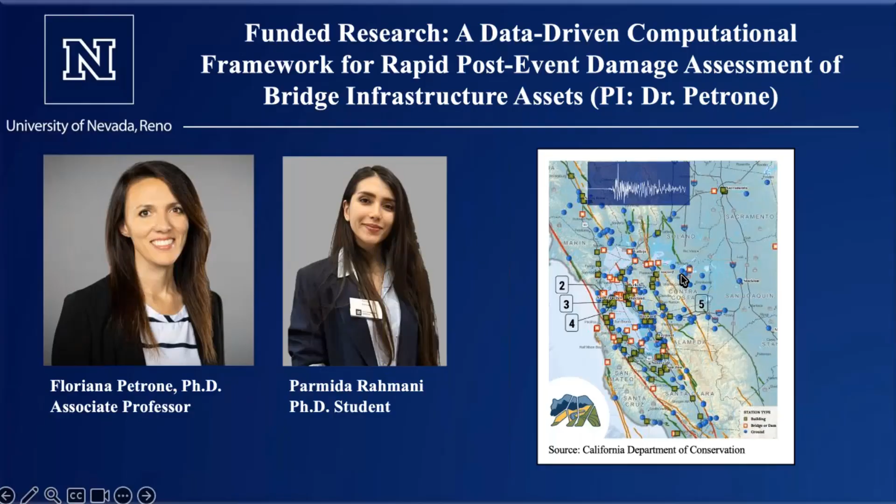In the first part, and I would say the core of her presentation, Parmida will demonstrate how she developed a computational tool to derive pushover curves and damage states for typical bridge columns. Then she will show how these algorithms are being incorporated into a larger automated framework for post-earthquake damage assessment, a system designed to process large amounts of simulated and observed data to estimate bridge condition and prioritize inspection needs. With this, I'll hand it over to Parmida, who will walk you through our methods, results, and exciting next steps for this work.

Thank you, and good afternoon, or maybe good morning, and thank you for being here, everyone. My name is Parmida Rahmani, a PhD student in the College of Engineering at the University of Nevada, Reno, working under the supervision of Dr. Floriana Petrone.

Today, I'm going to focus on physics-informed machine learning for reinforced concrete bridge columns, especially predicting the lateral force drift response and the different damage states. This work is part of a larger framework we are building for post-earthquake bridge damage assessment. The long-term goal is a tool that can help bridge owners quickly screen many assets right after an earthquake.

So here is the roadmap for today's talk. First, I will give a short introduction explaining why post-earthquake bridge assessment is such a challenging problem. Then I will walk through how we model bridges and generate a large library of nonlinear bridge simulations in OpenSees. After that, I will define the damage states that we use.

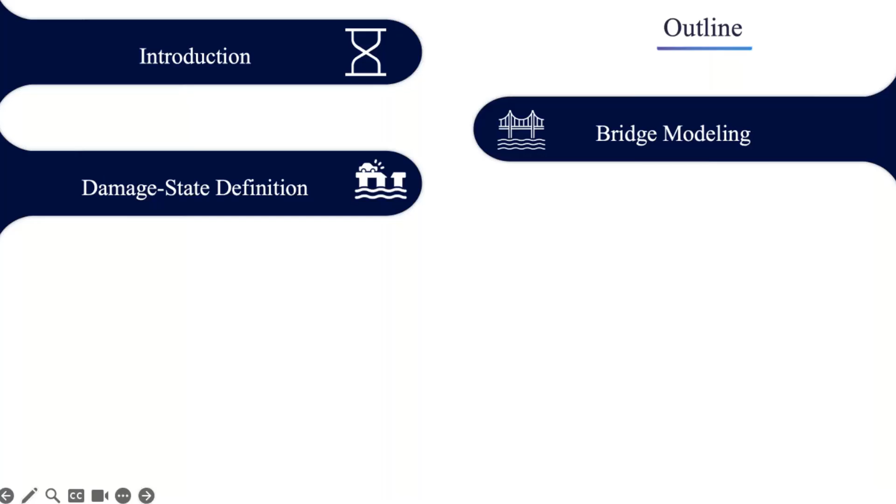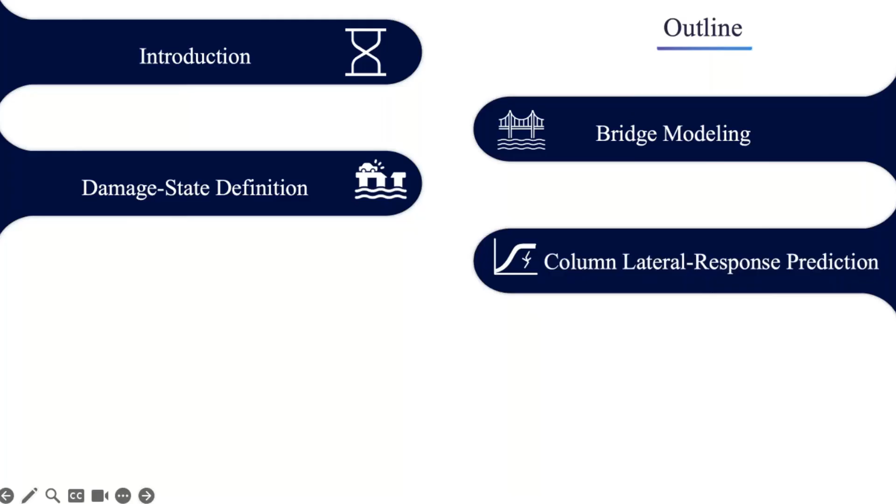From there we move into the first core result, predicting the lateral force drift response of a column and all damage states that we will see in a column. Then we extend that idea to a system level, predicting a full bridge dynamic response under earthquake ground motions.

Next, I will show how we extend and expand the ground motion dataset through simulation-aided data augmentation. And I will end it with conclusions and next steps.

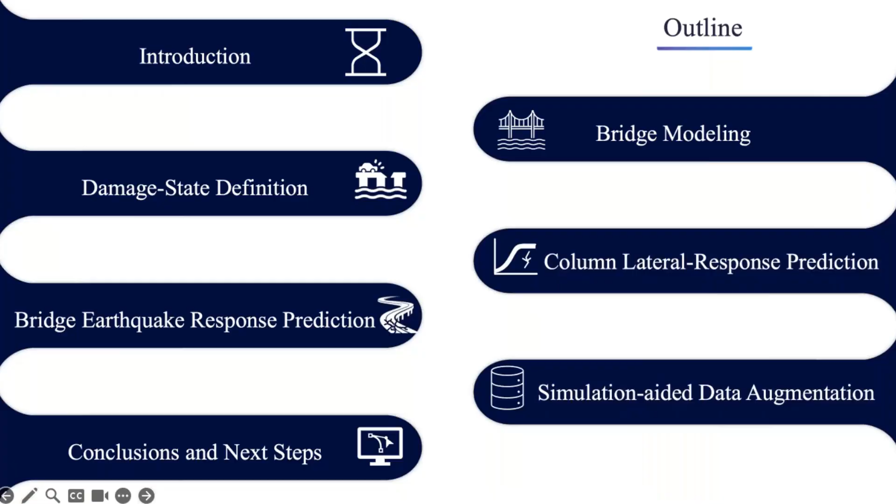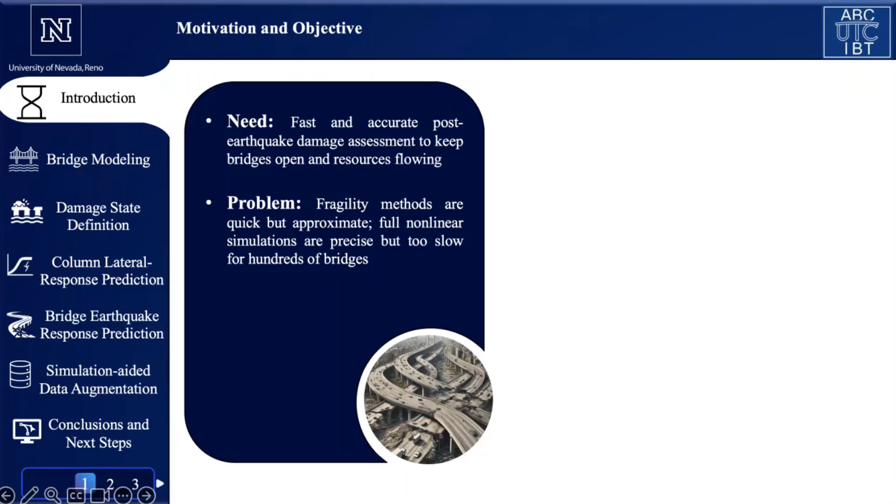After a big earthquake, owners need a fast and defensible call on which bridge stays open. Current tools are in two extremes: fragility curves, which are really fast but not that accurate, and full nonlinear simulations that are accurate but far too slow.

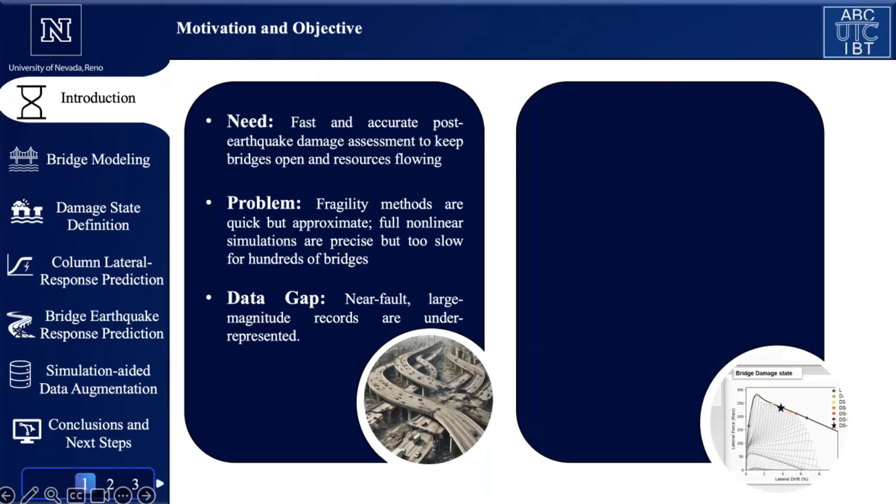We also lack near-fault and large magnitude records, so training data miss the worst cases where it matters most for engineers. So our goal here is a physics-informed, data-driven framework that is both quick and reliable.

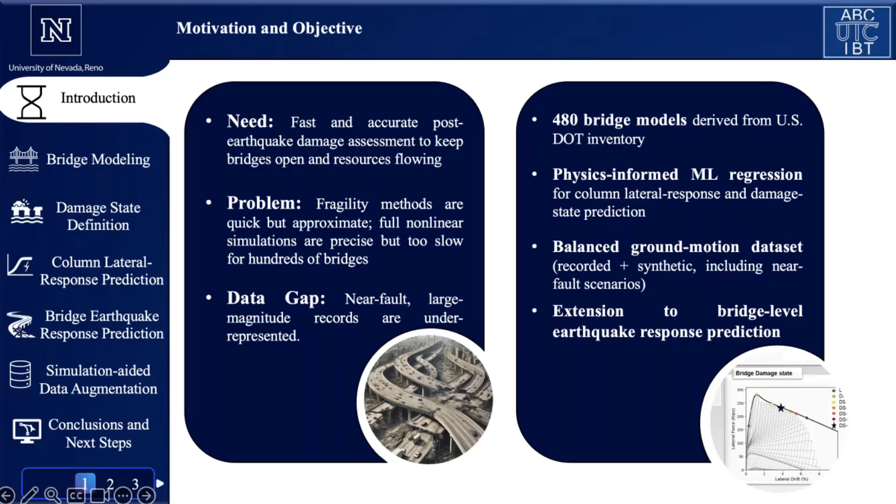We built and validated 480 inventory-based bridge models with realistic detailing. We trained machine learning regressors to predict column force drift, shape, and damage states almost instantly. We balanced our dataset by combining recorded motions with synthetic ones, and we expand and extend this work to bridge-level response. Finally, we deliver everything in a graphical user interface for rapid regional screening.

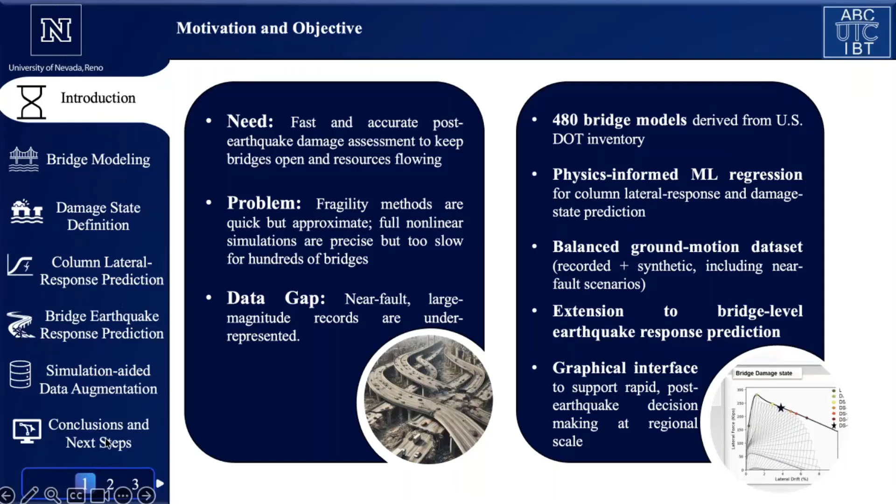In this slide, I will show you the full pipeline and framework of what we have done and what we are going to do. We first built and validated our 480 parametric finite element bridge models and defined the damage states.

We then augment the data by pairing each bridge with recorded and synthetic ground motions to balance rare and near-fault events. Next, we trained and tuned our machine learning regressor to predict the lateral force drift behavior and damage states, and also the final status of the bridge after an earthquake.

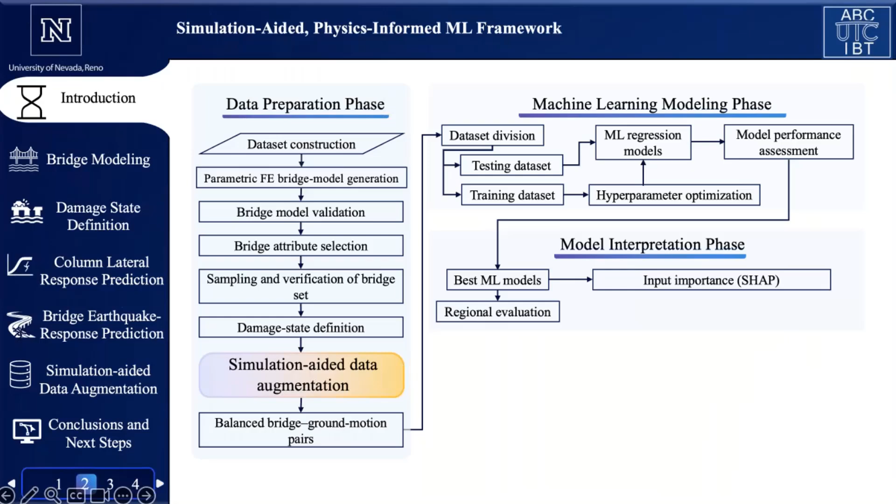Then we interpret the model with SHAP to see which bridge attributes drive predictions and check the regional robustness. Then we optimize our input values to keep accuracy high for field use. And finally, all of this powers a graphical user interface for rapid post-earthquake screening at the regional scale.

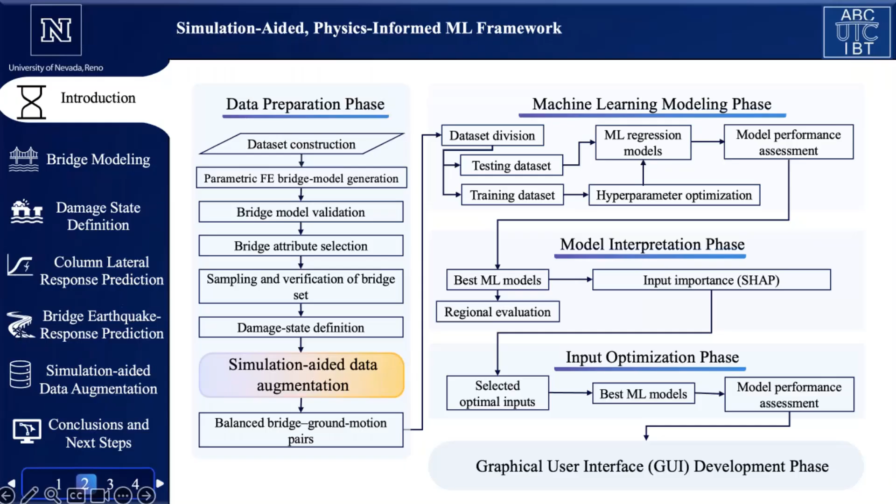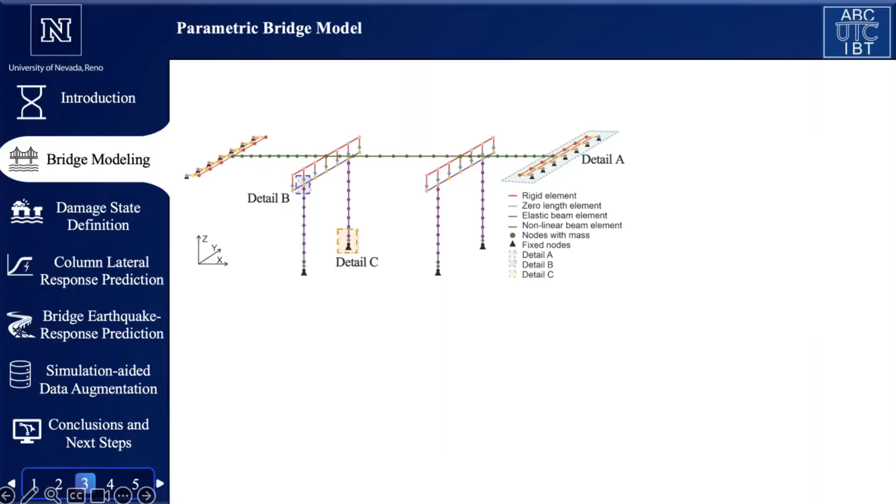Now I will introduce the parametric bridge model that we use to generate the inventory. This is a reduced order finite element model that we can parameterize and replicate across many bridges. The goal is to create a large set of realistic bridge variants so we can study post-earthquake damage at a regional scale. The bridge type we are modeling is a typical multi-span continuous concrete I-girder bridge with a straight alignment and seat-type abutment.

They are designed in what we call Era 2, after the San Fernando earthquake and before the next major seismic code shift. This is very representative of what agencies still have in service.

Even though today's focus will later shift to the column, the global model and the final goal includes all the critical components that influence the seismic response of a bridge: the abutment, the bearing, the bents, and the foundation material. This model is only a template that we vary to build our 480 bridge dataset.

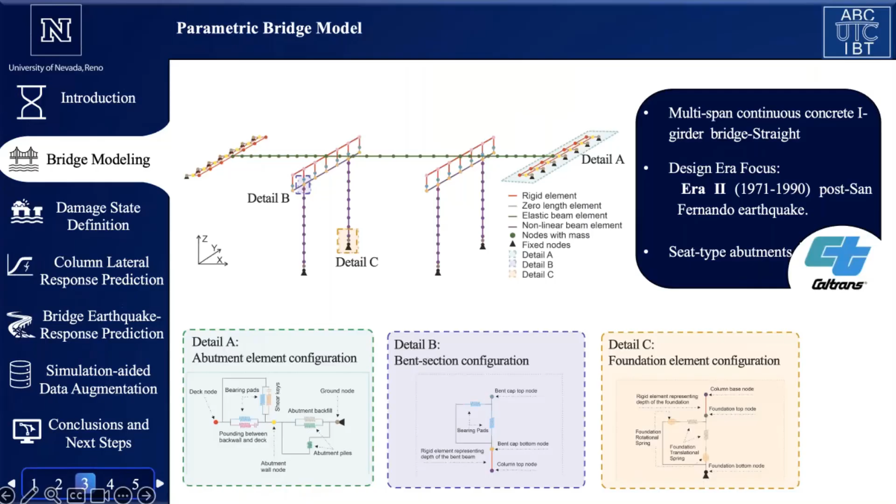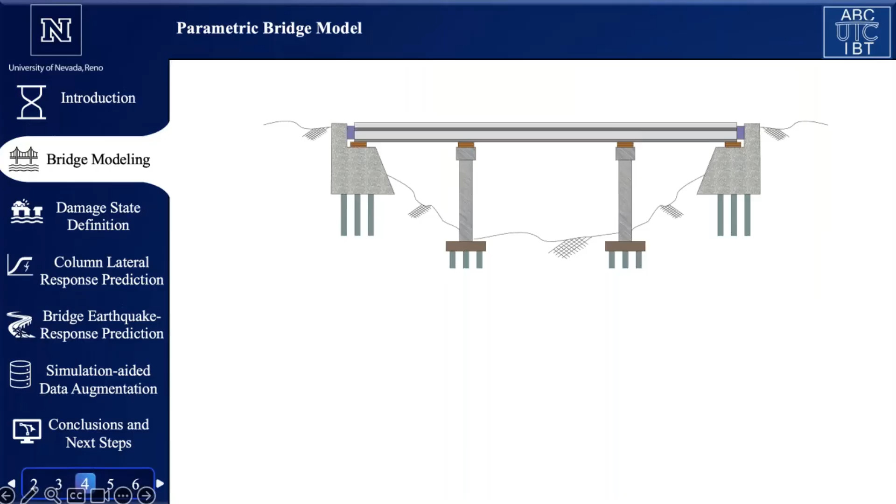This slide shows how we represent the nonlinear behavior of each component in our bridge. Even though later I'm going to talk mostly about the column response and the column damage state, in the global model we don't just idealize everything else. We explicitly model bearing, abutment, shear keys, and foundation using the component-level nonlinear force-deformation relationship from the experimental literature and the Caltrans guideline.

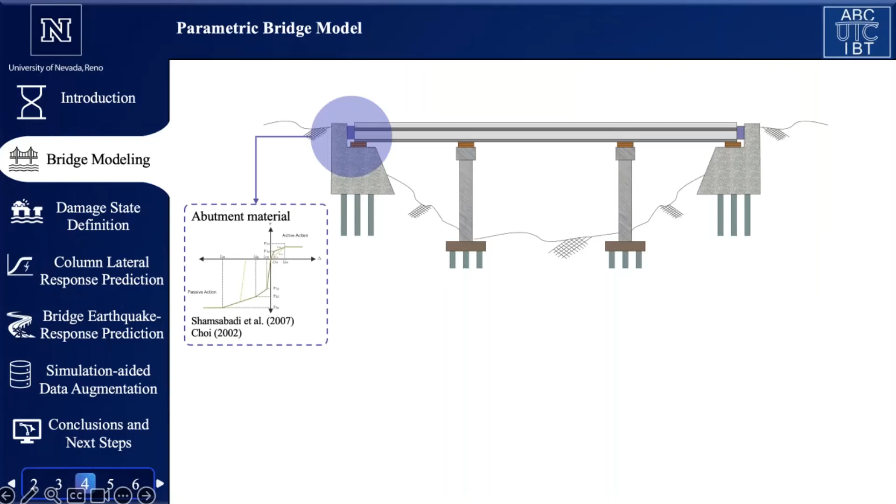Here you can see the abutment backfill interaction, which is modeled using nonlinear passive and active springs following Shamsabadi 2007 and Choi 2002. We also include the pounding behavior between the superstructure and the abutment following Muthukumar 2003, so we can capture the impact and energy dissipation at the seat abutment.

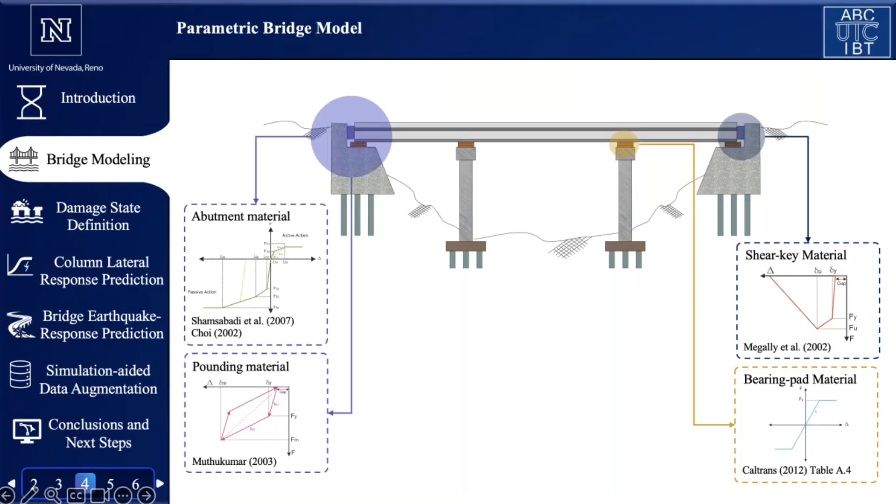We have the interior and exterior shear keys, which are modeled using the backbone curve from Megally et al. 2002, so they can resist the lateral load and then degrade. The bearing pads are modeled using the backbone curves from Caltrans 2012 data, so we have realistic flexibility and they are not just pin supports.

The column and the bent caps are nonlinear elements with nonlinear concrete and reinforcing steel material models. So the bridge model here is capturing all the main nonlinear mechanisms that control the system-level seismic responses, not just the column plastic hinge.

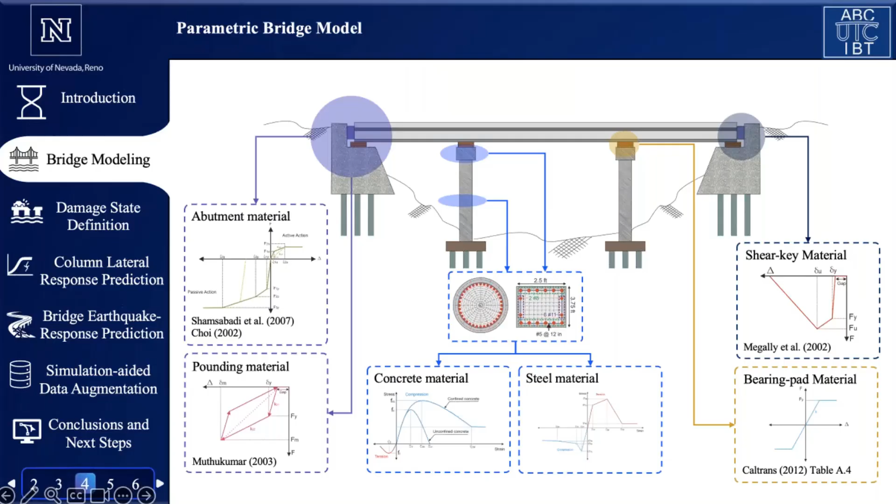In this slide I will zoom in on the column model, because columns are where we define damage. In earthquakes and past experimental studies, the most critical and visible bridge damage is usually concentrated in columns: things like concrete crushing, buckling, shear cracking, or loss of lateral load capacity. So after an event, an inspector typically classifies the bridge condition by looking at the column limit state.

In our framework, the columns are the primary component that governs the damage state. We use the hinge integration with 6 integration points so that the curvature demand is allowed to concentrate in the plastic hinge region rather than along the entire height of the column. At the base, we include two zero-length components in series with the column: a shear spring which can soften and degrade after the shear capacity is reached, and a slip spring which represents bar slip and fixed-end rotation due to strain penetration into the footing.

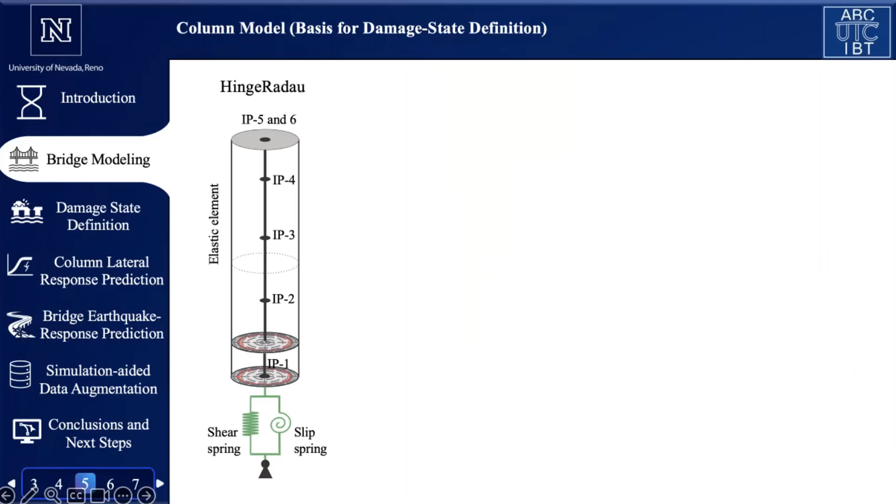That means our column model can represent both flexure-controlled columns and shear-critical columns, which are important in older inventories. To capture the behavior realistically, most of the column is the elastic element, modeled with effective cracked stiffness that keeps the model computationally efficient while still matching realistic global stiffness, and the plastic hinge length is assigned following the Caltrans SDC guideline.

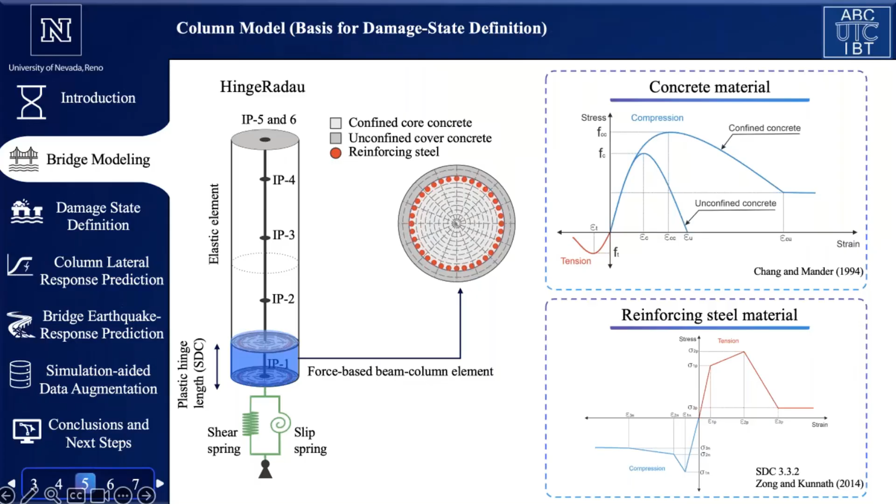So it's scaled consistently with the column geometry and bar properties. For the section behavior inside the hinge zone, we use fiber sections with confined concrete, unconfined concrete, and reinforcing steel. The concrete fiber follows the confined and unconfined compression backbone after Chang and Mander, and the reinforcing steel fiber follows the cyclic stress-strain relationship with yielding, hardening, and post-buckling degradation, consistent with the SDC and also the Zong and Kunnath model, to capture buckling in the steel as well.

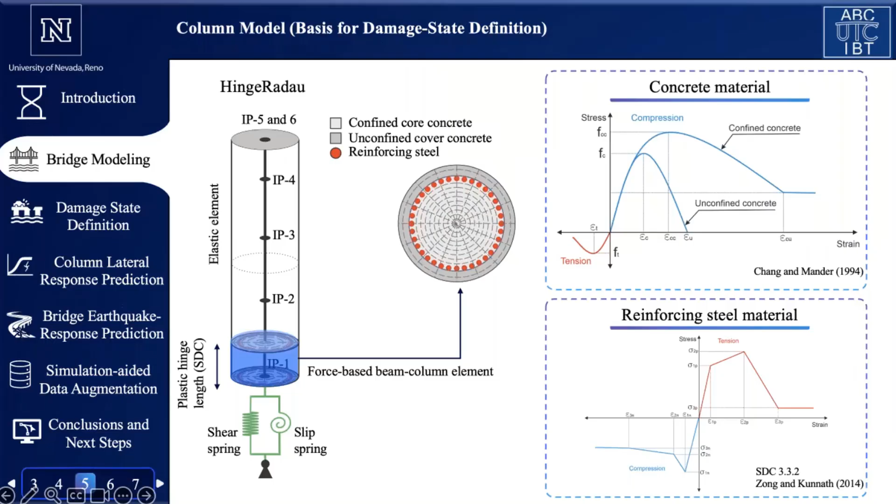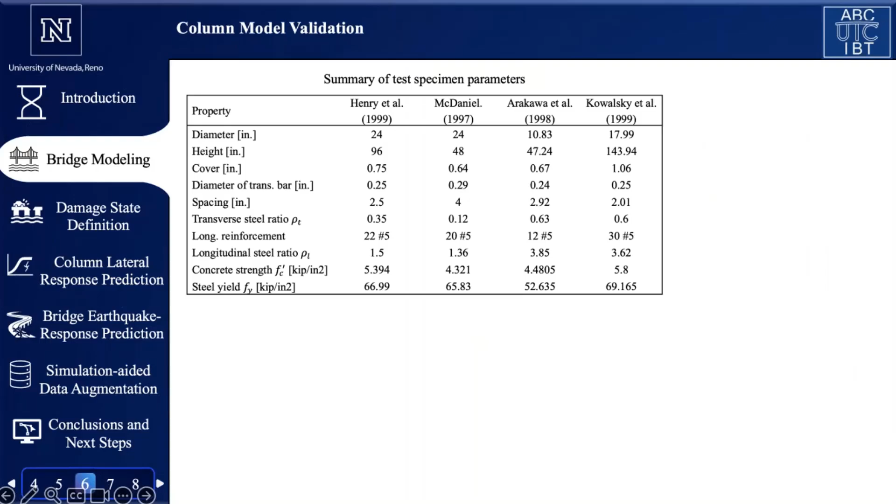The point here is that these tests span different detailing levels and aspect ratios, matching the range we see in our bridge inventory used for modeling. For example, you can see the longitudinal reinforcement ratio here, ranging from 1.36 to 3.85%.

This shows us that our column model can be used for a wide range of the variety of properties of columns. So going forward, when I'm talking about predicting damage state, those damage states are grounded in a column model that has been checked against the test data.

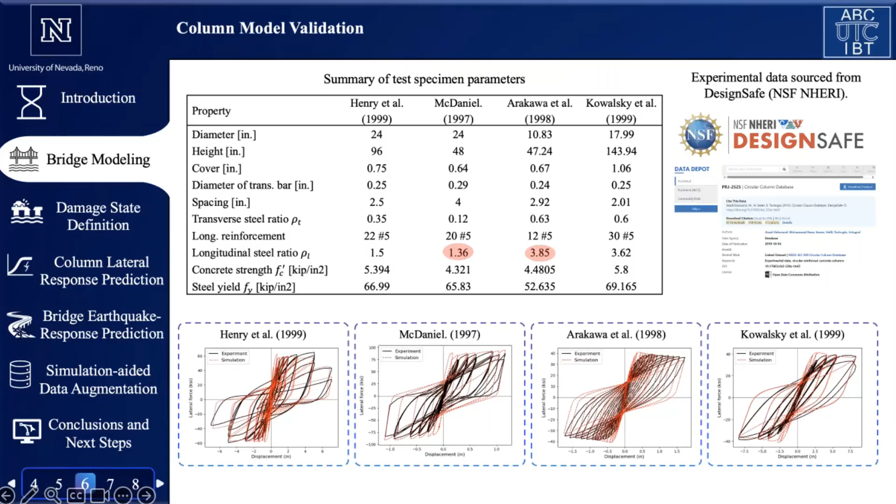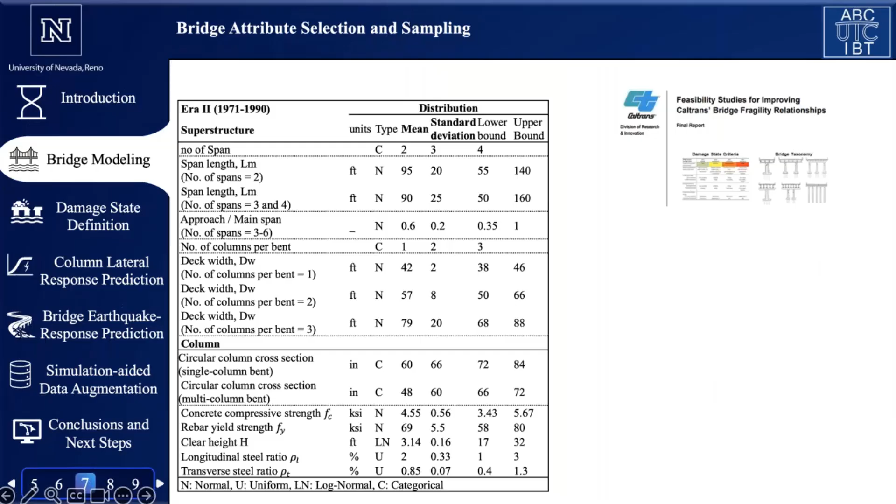The takeaway from this slide is that the 480 bridges in our dataset are not arbitrary. They are statistically consistent with the inventories, and they are sampled in a way that preserves the realistic geometric and detailing characteristics we see in the real world.

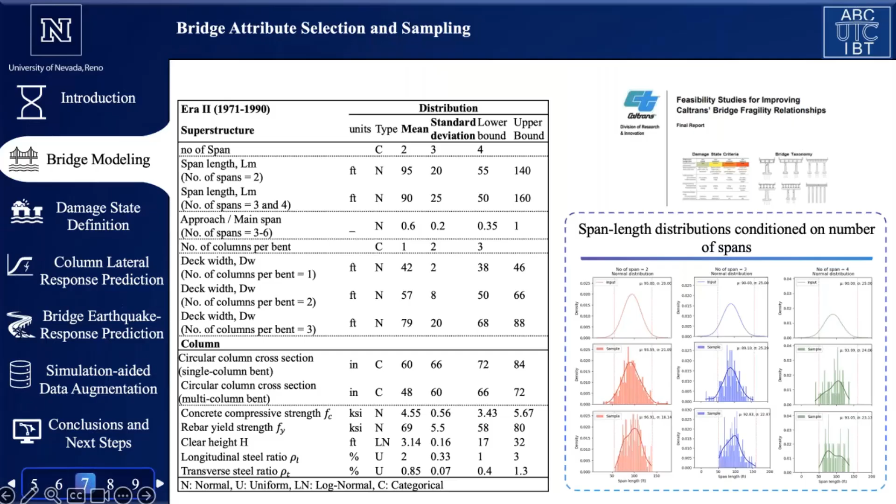So this step is basically a quality screen. It confirms that statistically the bridges in our dataset have periods in the range we would expect for multi-span, seat abutment, reinforced concrete bridges.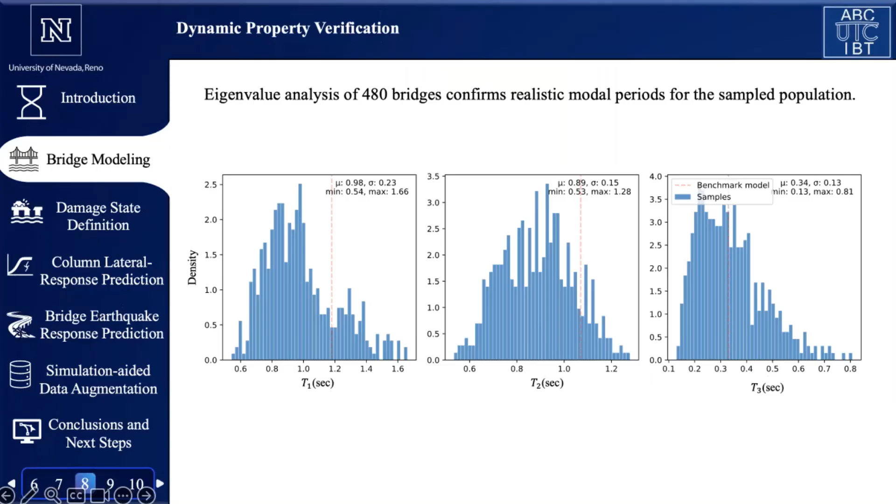You have heard me say that columns control damage from past earthquakes, and from inspection practice, most post-earthquake bridge decisions are driven by column condition, things like spalling, loss of core, exposed steel, bar buckling, and so on. Because of that, in this work we define damage state at the column level. We start from the qualitative descriptions in Vosooghi and Saiidi 2010 and related Caltrans style criteria, and then we translate those into quantitative trigger points that we can detect in our simulation.

Here is damage state number 1, in light green, minor spalling. You are seeing initial cover concrete spalling at the compression face. Structurally, the cover concrete reached its crushing limit, but the core concrete and longitudinal steel are still elastic. This corresponds to early visible damage, but not loss of capacity.

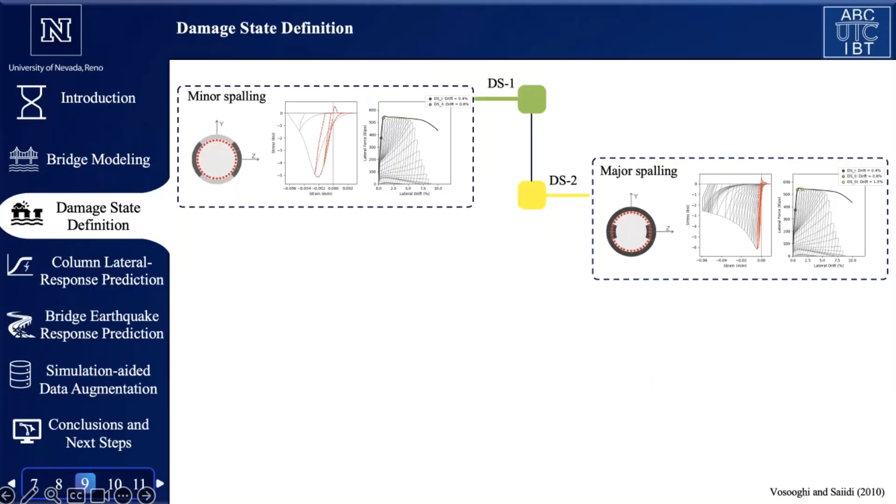Damage state 2 is major spalling. Spalling becomes extensive, the damage penetrates deeper, but the core confinement is still mostly intact and the hoops are still engaged. So you have clear visible damage and you are consuming ductility, but you haven't lost any confinement cage yet.

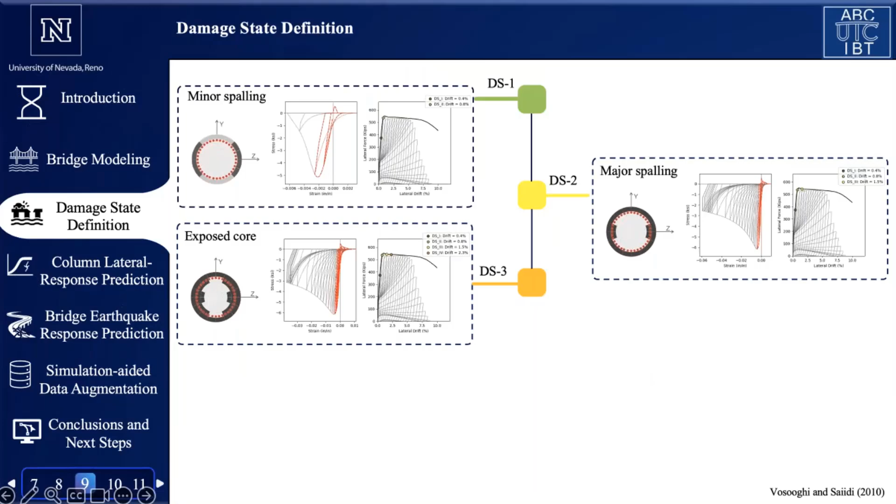Damage state number 3 is the exposed core. At this point, the cover concrete has peeled off enough that you are looking at the core concrete and reinforcement. This is a serious limit state because the confinement is now active and local crushing of the core is starting. In our model, this is mapped to a deeper concrete compression damage in the confined zone.

Damage state number 4 is longitudinal bar buckling. Here, the longitudinal reinforcement starts to become unstable in compression inside the plastic hinge region. In the model, this is where the steel material hits the buckling or strength degradation trigger. Practically, this is where inspectors start thinking about restricted service or closure of the bridge.

And damage state number 5 is multiple bar buckling or rupture, which is essentially the failure. So these 5 states do 2 things for us: they align with what inspectors actually see and report in the field after an earthquake.

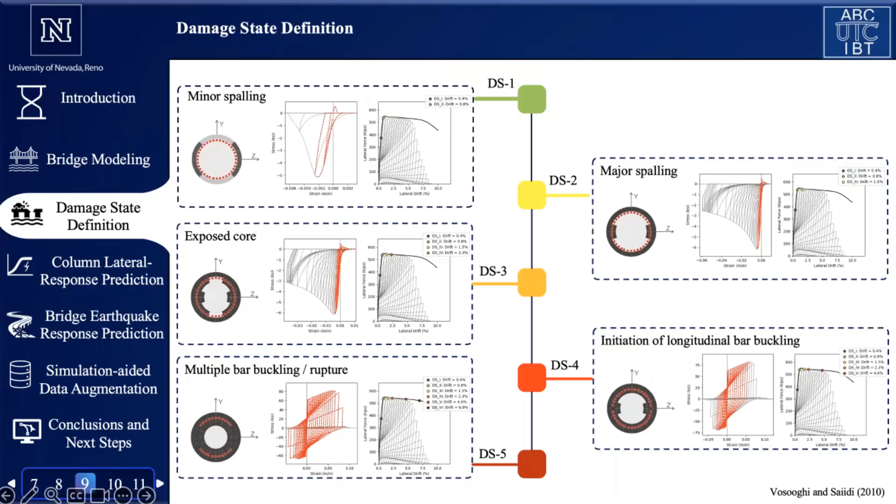Second, they give us a consistent numerical label and numerical values that we can train a predictive model on these data later. Instead of just using a simple binary label like collapse and not collapse, we have 5 physically meaningful stages that give us much finer resolution. It's important because the machine learning model is trained to predict not just safe and unsafe, but which state the column is in. From this point forward, when I say damage state, I mean one of these 5 column level states.

Now that we have defined the damage states physically, we apply them to every column in our bridge population. On the left, each gray line is the lateral force drift pushover curve from one column. The color points mark the first time that the column reaches each damage state, from damage state number 1 in green through damage state number 5 in dark red. You can see a very clear progression here.

Damage state 1 and 2 happen at low drift, near first cracking and spalling, when the column is just starting to yield. Damage state 3, the exposed core, tends to occur a little later around the post-yield area. Damage states 4 and 5, which involve bar buckling and rupture, show up in the large drift softening range, where the column is losing its strength and stability.

On the right, we are looking at the drift ratio at first occurrence of each damage state across all columns in our dataset. For example, how much drift does it typically take for damage state number 1 to appear? What about 2, 3, and so on? You'll notice that the lower damage states have tighter, more concentrated distributions, because the earliest failures tend to happen in a fairly repetitive and repeatable drift range.

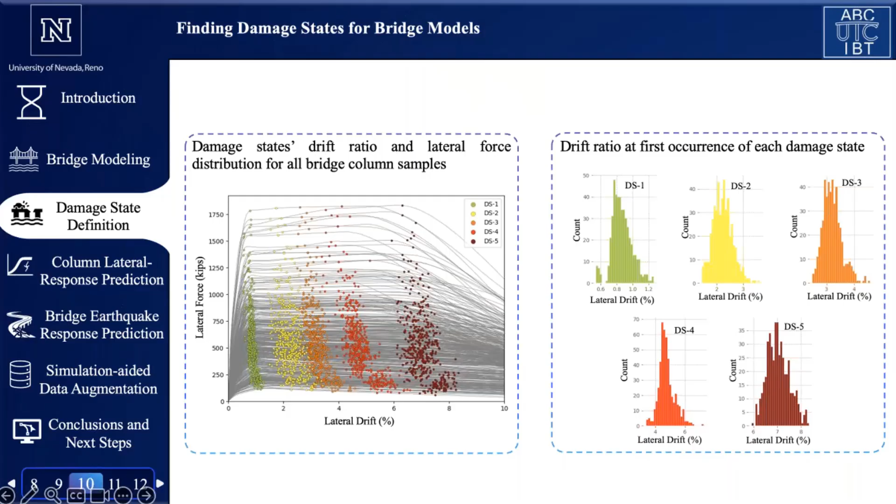And that matters for two reasons. We are not just feeding the model a bunch of redundant copies of the same variables, and it lets us interpret the model more clearly and cleanly later, because each feature is bringing different physical information. Now, it doesn't prove there is no nonlinear interaction, but it does confirm that we are starting with physically meaningful and distinct predictors.

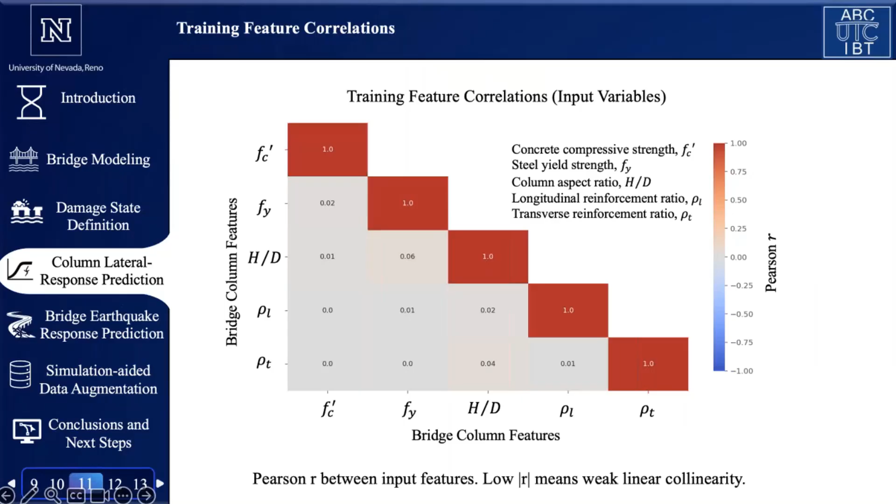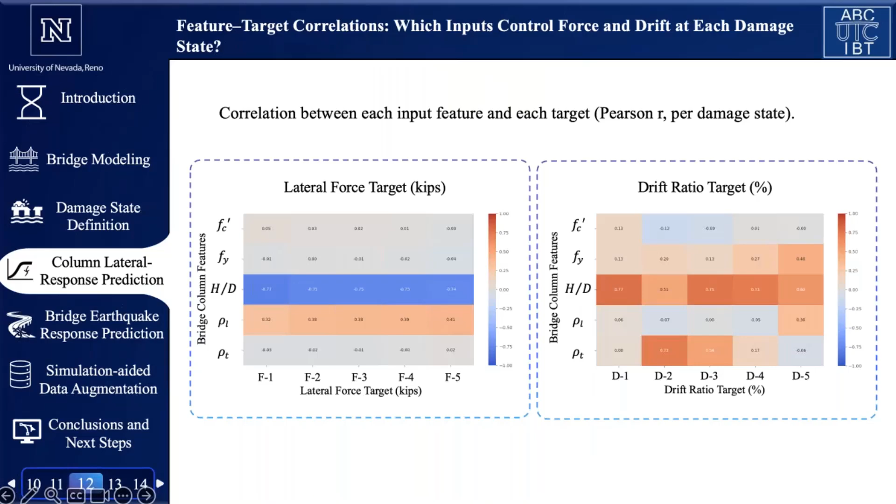But beyond that, in this view, it's hard to clearly see the expected roles of confinement, bar buckling, and bar quantity, because the influence of aspect ratio tends to dominate the correlation. In other words, the slenderness is so strong that it can mask the secondary physics. So to uncover these mechanisms, here we hold the aspect ratio within a narrow range. Basically, we fix the column slenderness, and then we recompute the correlation between each input feature and the drift at each damage state.

And now you can really see the physics emerge. For example, at damage state number 2, which we define as moderate spalling, steel yield strength becomes more important.

At damage state number 3, the exposed core, transverse reinforcement ratio, basically confinement, dominates. Better confinement holds the core concrete and keeps the cage engaged longer, so you don't expose the core as early. That's a classic confinement mechanism for reinforced concrete bridge columns.

By damage state number 5, multiple bar buckling or rupture, bar behavior takes over. Both the Fy and the longitudinal reinforcement ratio are strongly correlated with the drift where those severe damage states occur. That lines up with what inspectors worry about after an earthquake, where you talk about restricted service or even closure.

So by controlling for the slenderness, we were able to tease out and see the role of concrete strength, yield strength, and confinement. Importantly, those roles line up with how practicing engineers already think about the column's damage, and how we define our damage.

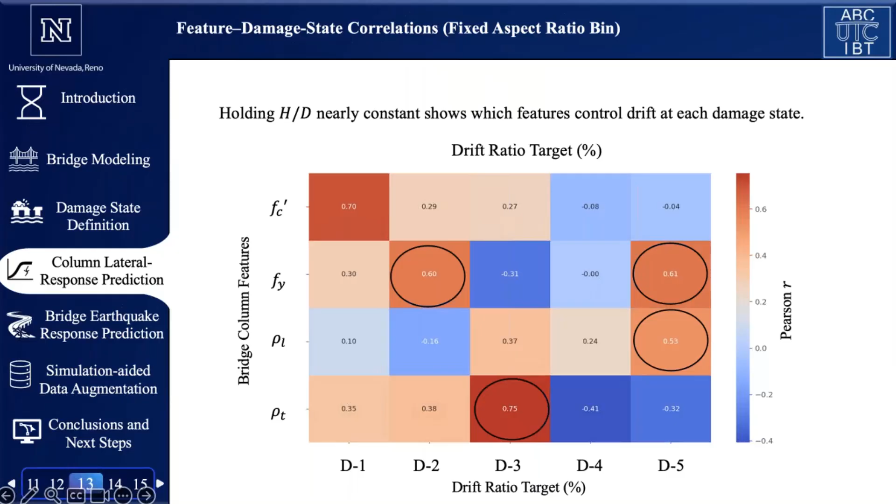Now that we have defined the target, the push curve shape, and the drift at each damage state, we can train our model to predict them directly from the structural features. We evaluate 11 regression models, including linear models, tree ensembles, support vector machines, and a small neural network.

These bar charts summarize the test performance across several metrics: absolute error, root mean square error, normalized error, R square, and the concordance correlation coefficient. Two patterns stand out here.

First, the support vector regression with the RBF kernel consistently gives us the lowest error. For example, it's at or near the minimum root mean square error, and among the highest R square and CCC on the held-out test set.

Second, it does this without a large systematic bias, meaning the predictions track both the magnitude and the trend of the true response. Based on this comparison, we select SVR as our primary predictor, tune its hyperparameters with cross-validation, and lock the model for the rest of our analysis and for use in the graphical user interface.

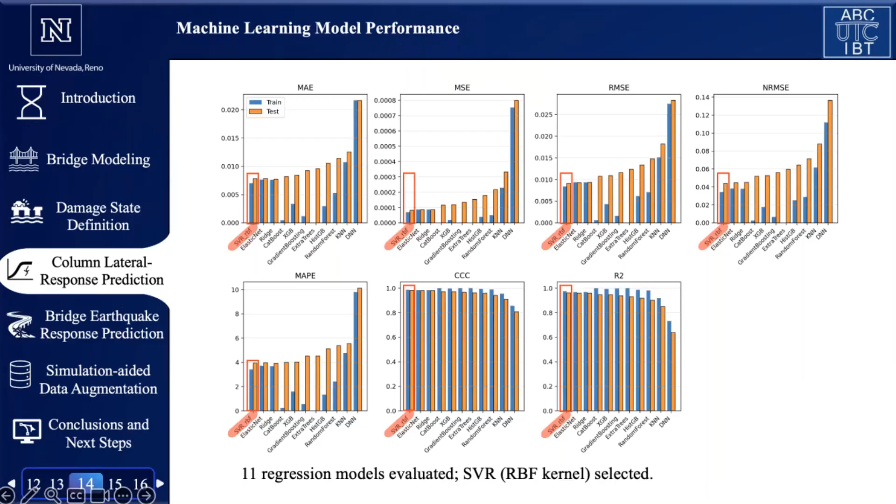Now I will show you what this actually looks like on column models that the model never saw during the training process. Here I'm showing you four columns from the test set, so these were not seen during training.

For each column, the solid gray curve is the true pushover envelope from nonlinear analysis, and the dashed black curve is the model's predicted piecewise approximation. The shaded region between them is the error area, or energy, and the colored markers here are the predicted damage states.

There are two key takeaways here. First, the model is capturing the overall lateral force-drift shape. The area between the predicted curve and the true curve is small, which lines up with the low root mean square error and high R square you saw in the previous slide.

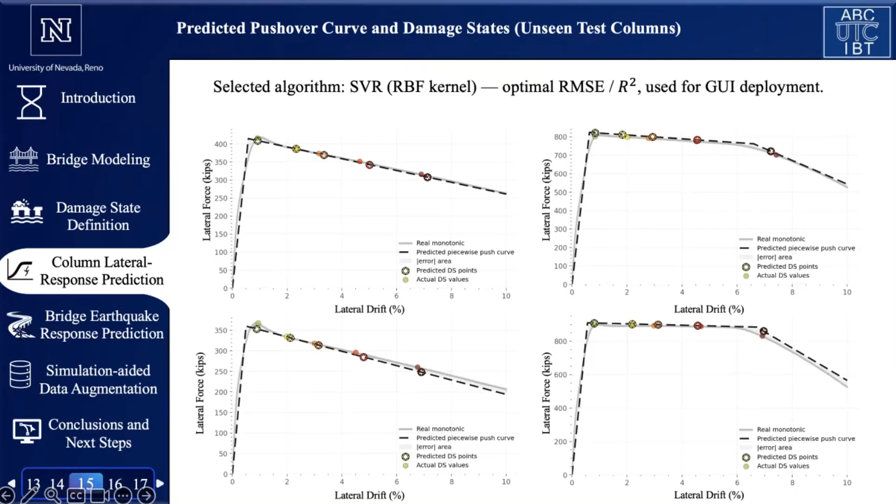Second, and more importantly, the model is placing the damage states close to where they actually occur in our nonlinear analysis results. Up to now, everything I have shown was at the column level under lateral loading, using machine learning to predict each column's pushover curve and the drift at which it reaches each damage state.

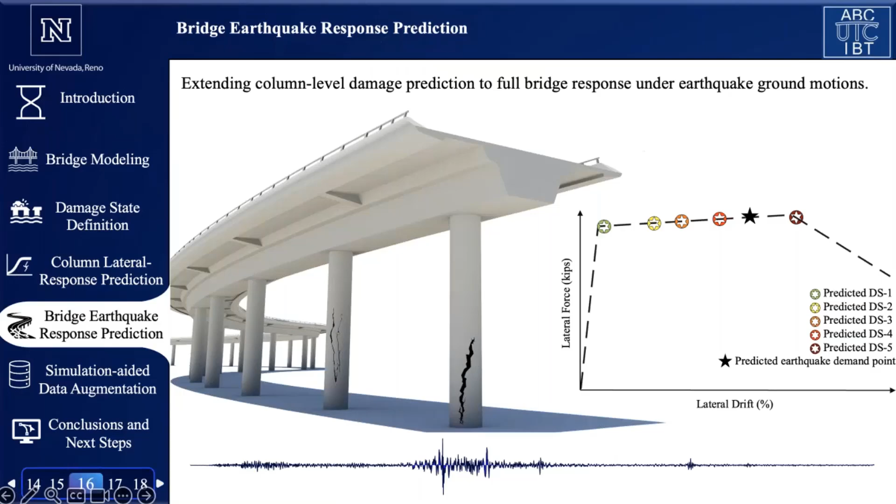Now we have talked about the bridge side of the problem a lot. We built a realistic inventory, we modeled the column in detail, we trained our model that can predict the push curve and the column damage state. Now we need the other half of the equation, the earthquake demand.

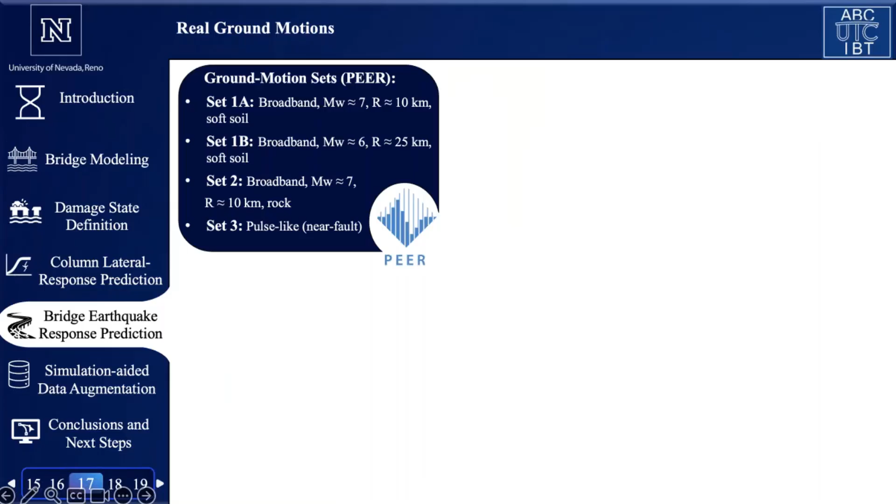And this is a problem: those high intensity motions are exactly where bridges are most likely to hit damage state 4 and 5. Those are the states where owners have to decide, do we shut this bridge down or can we use it? So to test how this affects predicted damage, we randomly paired the real ground motion with our 480 bridge model.

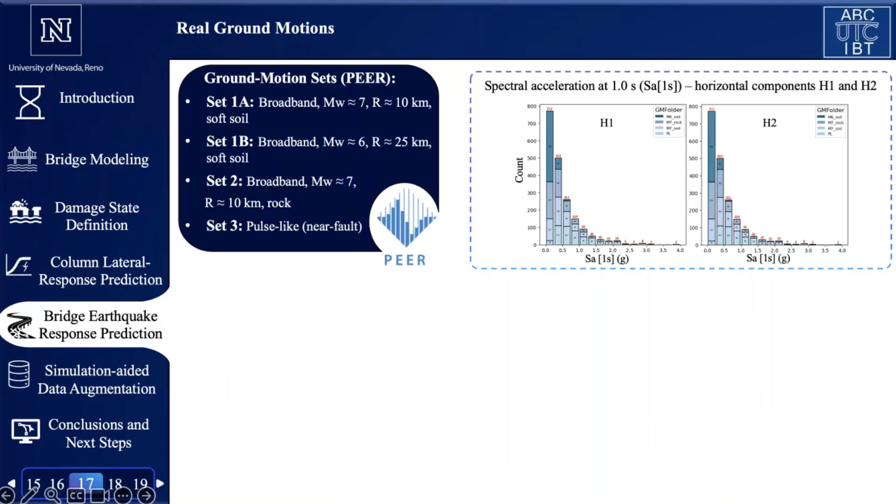Second, you will notice that almost everything is living in damage state 1 and 2, and we almost never hit damage state 4 and 5 or collapse in this sample of recorded motion. That's not because the bridges are magically unbreakable. It's because our real recorded motion set underrepresents the really damaging, high intensity shaking.

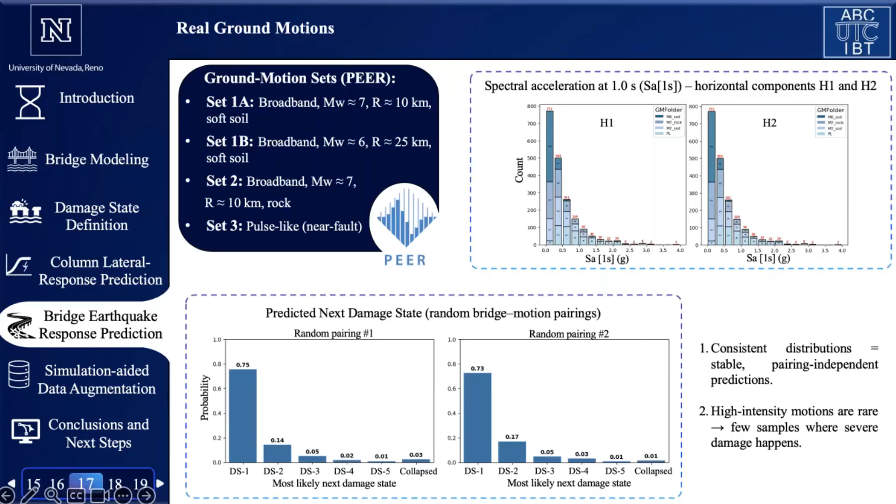And that is the gap. If we train only on these recorded motions and use only this motion, the model doesn't see enough severe damage, which are actually the ones agencies care about most after an earthquake. So in the next step, we'll augment and try to balance the motion.

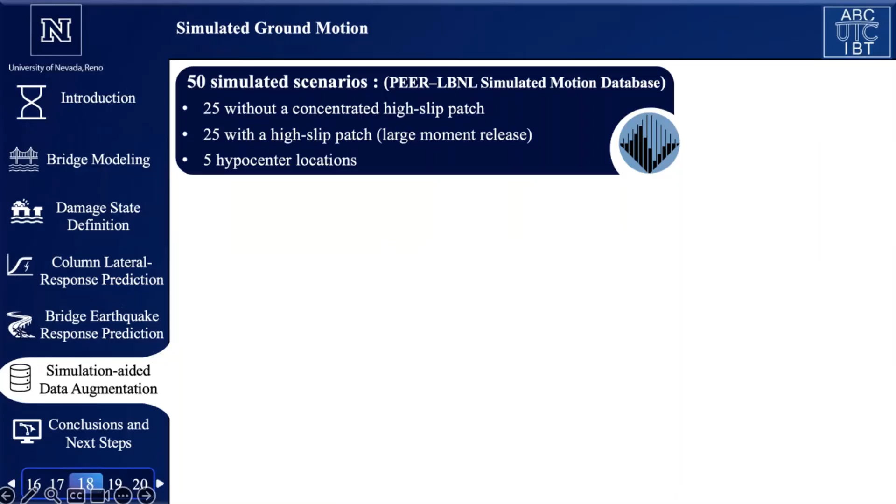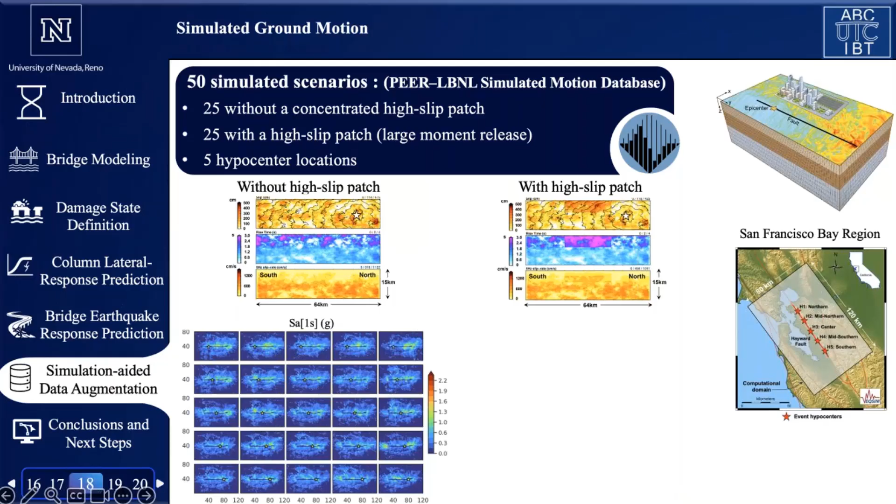And here are the spatial maps of the spectral acceleration at 1 second for the no high slip patch cases and the with high slip patch cases.

We cannot use all of those synthetic motions because they would again create an unbalanced set, since most of the motions are far from the slip, far from the fault, and they are not giving us that high intensity motion. So, I want to just review and summarize what we have done.

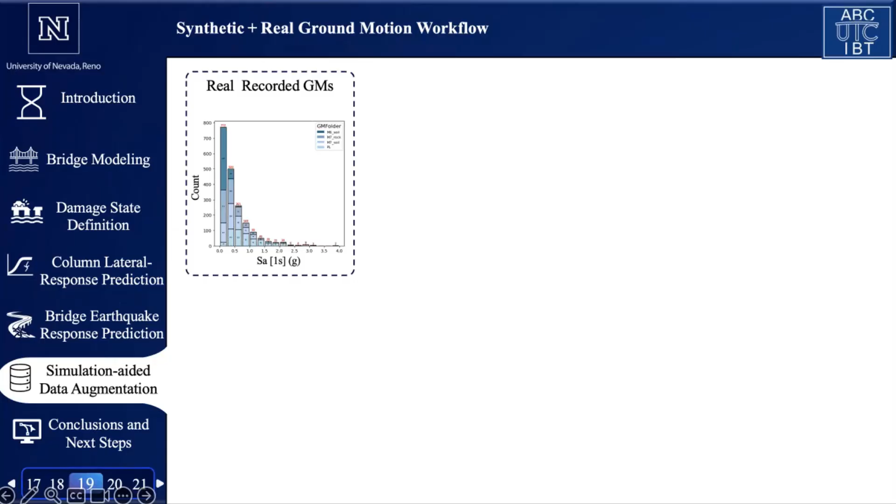We start with the recorded PEER motions. Their spectral acceleration at 1 second distribution is heavy on the low to moderate intensity and thin in the high intensity tails.

Next, we bring in simulation scenarios and filter them, keeping only those cases that span the missing high intensity range. Then we merge the recorded and filtered synthetic set to get a more balanced intensity measure distribution, filling the high spectral acceleration bins without overwhelming the data set.

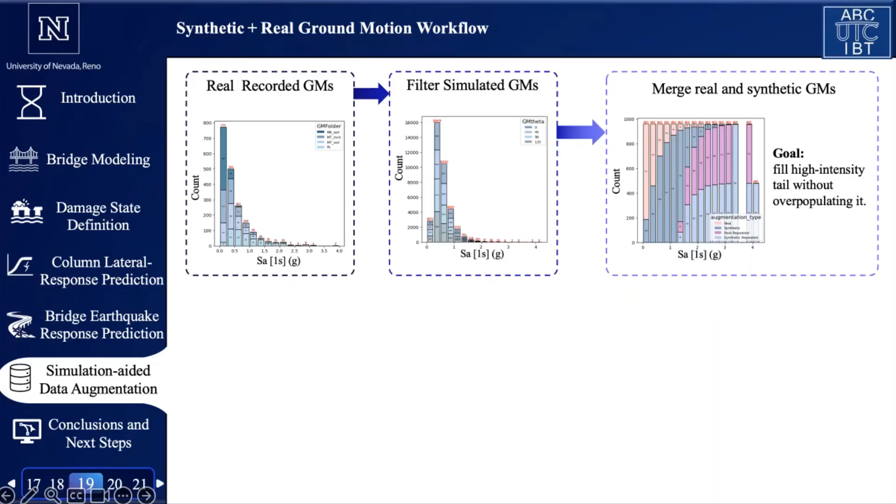We pair this motion set with the bridge population and predict the most likely next damage state for each bridge and motion pair. We now see damage states four, five, and collapse appear here, although the distribution is still somewhat skewed toward states 1, 2, and collapse. To fix this, we train an initial model and interpret it. The feature importance shows that the pulse period, spectral velocity, fundamental period of the bridge, and several bridge attributes strongly drive the damage.

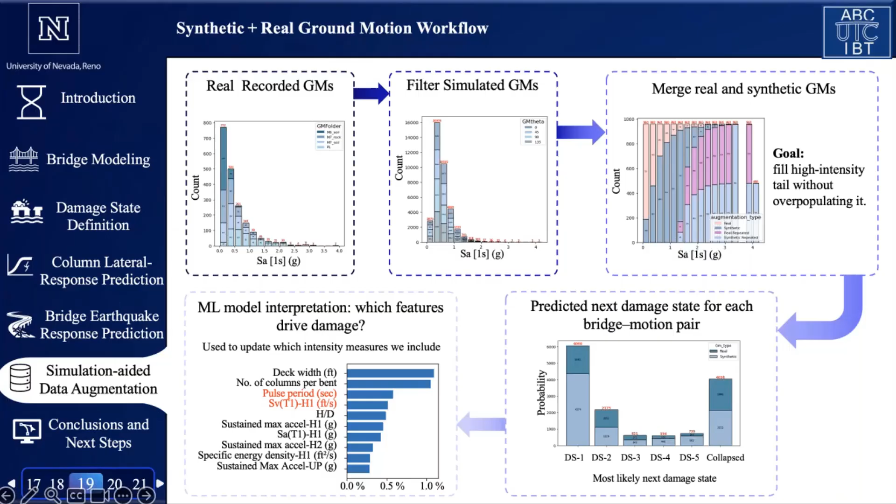We use that insight to define a repeatable selection loop. In this slide, I'll show you a diagram of the control logic for how we iteratively build a balanced and physically consistent data set.

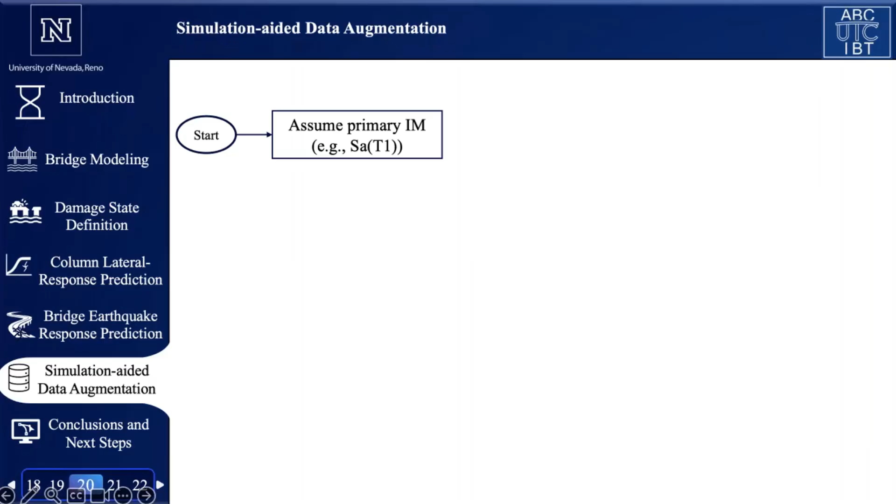We pick a primary intensity measure to organize the motion, starting with spectral acceleration, and compute that intensity measure for recorded motion and in parallel for synthetic motion. Then we find the undersampled bins in the real motion distribution. Next, we filter our synthetic and simulated ground motion to fill those gaps. We merge these motions together and resample to flatten the intensity measure histogram.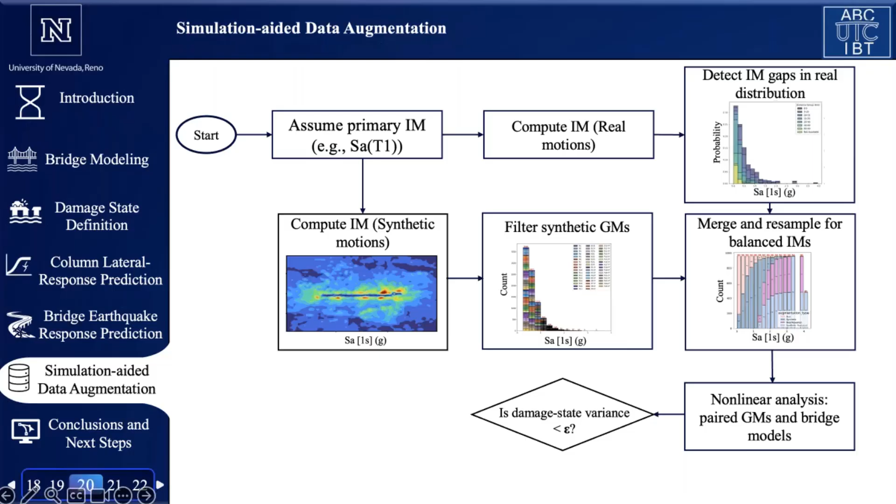We pair each motion with our bridge inventory, run a nonlinear analysis, and label the most likely next damage states. If the damage state distribution is still skewed and the variance exceeds epsilon, we train and interpret a model to identify a better intensity measure and key bridge attributes. Then we update the intensity measure and go through the loop again.

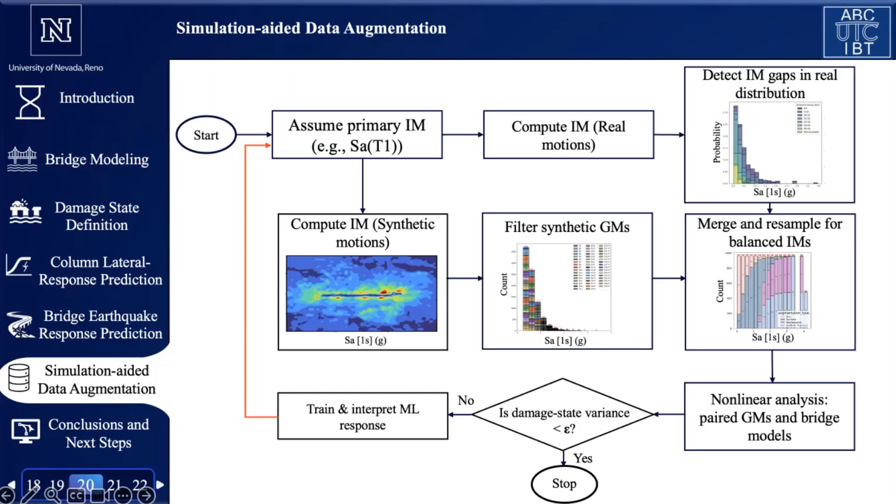We stop when the damage state spread meets the criteria, giving us a balanced training set that reflects both moderate and severe damage. This loop is why the final predictor generalizes well: coverage is balanced and the features are grounded in bridge physics.

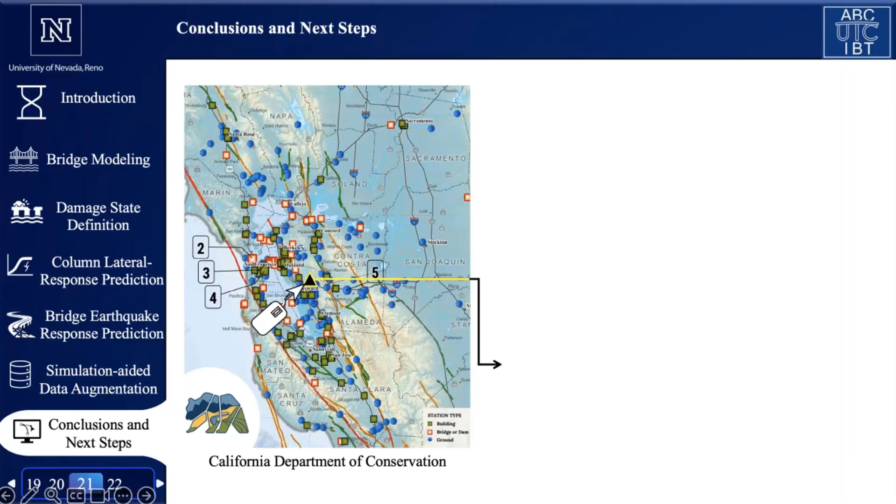Imagine we are the California Department of Conservation. After an event, a user clicks a location on the map and retrieves the ground motion intensity measure for that site. They select the bridge of interest and enter its attributes, span length, number of columns per bent, and so on. Our trained model combines those attributes with the intensity measure and gives not only the shape, the envelope of the cyclic pushover of the bridge, but also the different damage states and the final state, the damage state that bridge will be in after an earthquake.

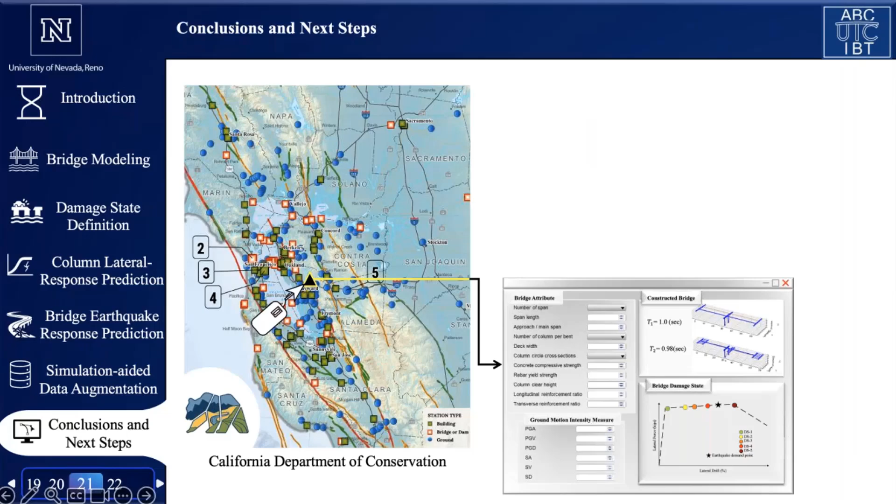What we delivered here is a large scale data set, generated for 480 distinct bridges which are realistic, a robust ground motion selection, and a trained regression machine learning model for piecewise pushover shape, continuous damage state metrics, and earthquake demand.

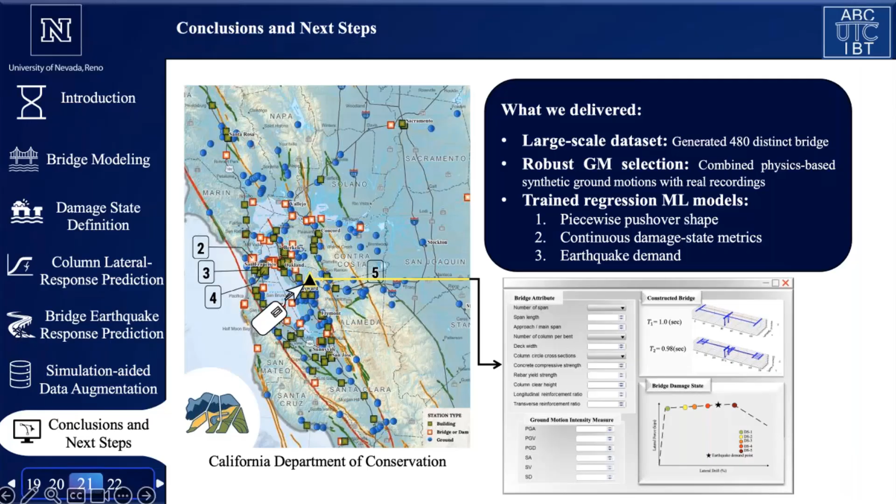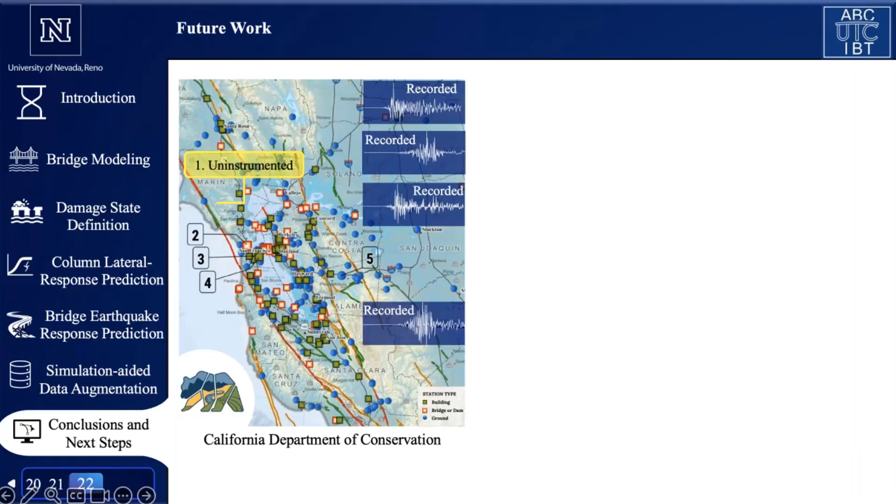Our future work: for example, here at the California Department of Transportation or Conservation, you can see site numbers 2, 3, 4, and 5 are recorded and instrumented locations. But if someone wants to see the bridge status after an earthquake in an uninstrumented location, there are two paths. You can use physics-based simulation, which needs a lot of high performance computing, money, and effort, or you can use the machine learning model, also using synthetic motion to validate the model, to use the neighboring intensity measure of the station and predict the intensity measure of the uninstrumented location and area.

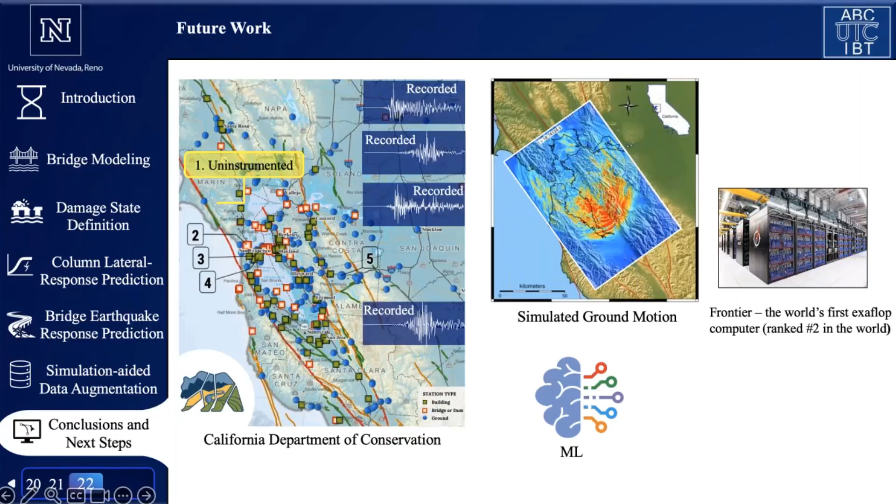Thank you for your attention.

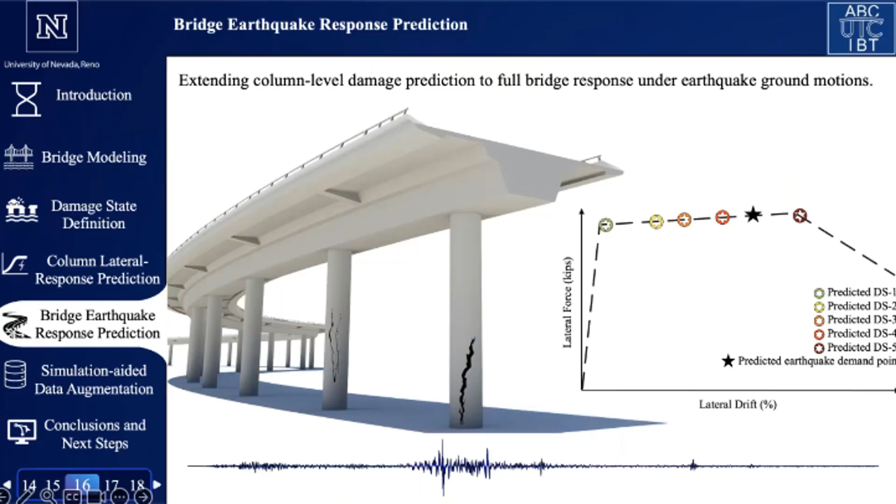Another interesting question involving AI: can you discuss AI hallucinations in context with this project? We constrain the input to the physics-based variables. We train within the domain. We apply the push curve checks and validate it with the experimental data and surface uncertainty flags. So if a query pair is outside of that envelope, the graphical user interface just pops up, noting the error, and that the inputs you gave us are out of scope.

Here's another one. It says, this is interesting research, but can it actually be used in the case of an earthquake? And is there a factor of safety and also reliability? We didn't do a factor of safety or reliability, but it's just a hint, a flag that comes to the owners, and they can decide to send the inspector immediately. Maybe I can hand it to Dr. Petrone to explain more about this question.

Sure, so really this is strictly related to what we were just describing about reliability. We haven't, and we're not going to, introduce any safety factors. We are just going to provide, possibly in the near future, our best prediction with a range, just a confidence level, a range of uncertainty, making the end user conscious about conditions where that prediction may be affected by large uncertainty, and where inspection might still be needed, especially for high damage cases. In cases where that uncertainty is very small, very narrow, we can have larger confidence in those results.

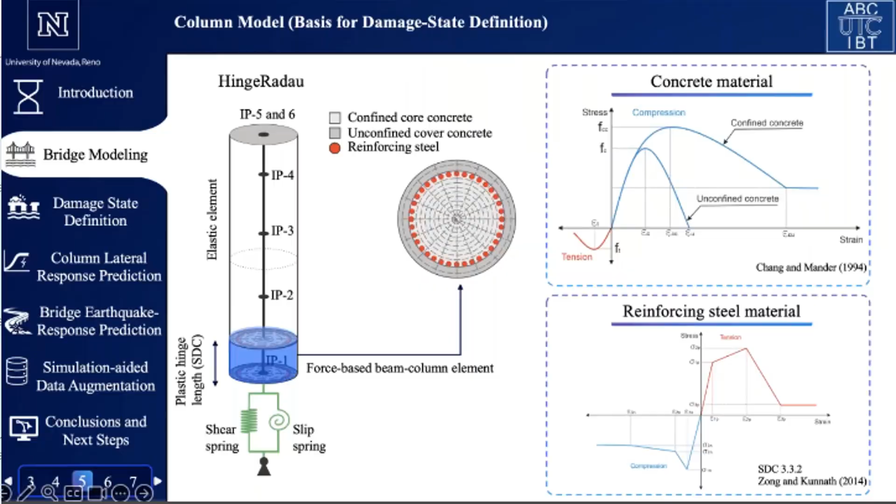How long does it take for an owner to gather the data needed for input for a specific bridge? Some of the data seems to require an in-depth look at drawings. To be honest, the data is really obvious for each bridge, and I think the DOT has access to all of it. We're assuming they will consult the structural drawings and get key information on the materials, for example steel yield point and concrete peak strength, and geometry. Based on our preliminary results, in our view that will be enough to obtain a prediction of the response for that same column and that same bridge.

All right, next question. It seems that SSI is neglected in the damage prediction. Therefore, the predicted damage state should be better validated from actual earthquake records and field observations.

Any comments on that? Yeah, so it's a good point. So we do have a simplified way to just represent the interaction between the foundation and the soil.

For now, we have finalized the model prediction for the nonlinear lateral response of the columns. But once we move on to complete the analysis on earthquakes, that's a great point, and we will try to retrieve as much real data from earthquakes as we can to address this issue. That will be embedded in the data and response of the bridge, and it will be key to go back and look at the soil properties and the specific foundation so that we link data in the correct way. That's a good observation, and it's something we plan on doing.